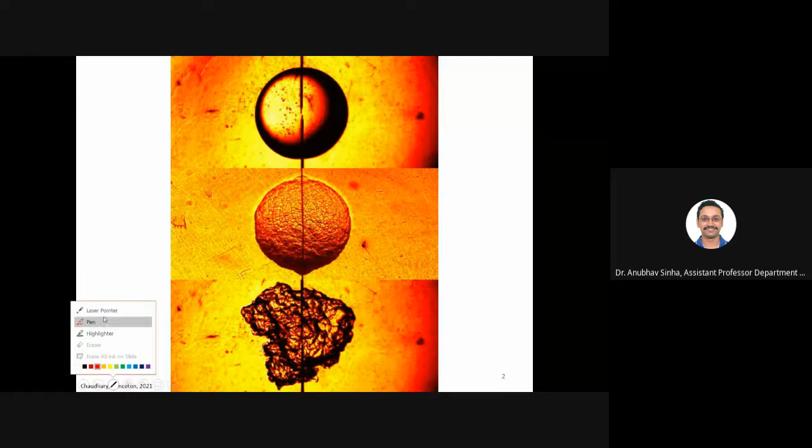Turbulent combustion is in fact a very hot area of research. And how do you understand or model what goes on in an actual engine, what goes on in a gas turbine or IC engine? This is what we are going to understand. So let me start with one slide from Professor Chaudhary. So what is shown here is spherically expanding flames. I take a big vessel, I fill it with some fuel, and I just burn it.

But as you can see, there are three different phases. His statement was three phases. Three phases of combustion. So can anyone define what are the three different aspects or three personalities of flame? What you can see here. What is the first one? Initiation. No, no, no. Let us say these are three different cases, not the same case. Three different types of flame.

Sir, can you repeat the question? I cannot understand what the question is. Laminar, semi-turbulent and turbulent. Yes, yes, yes. So my question is, three different types of flame are visible here. So what are the three different types? First one is what you have already studied. What is that? Laminar flame.

This looks nice, smooth sphere, no wrinkles. It is nicely going out. Laminar flame. But this is a very ideal scenario. Most of the cases you'll have something like this or this. So this is a highly turbulent case. This one, you can see some cells are starting to develop. You can see some cell-like structure, right? You can see or cannot see? Yes sir. Okay, so these are called cellular instabilities.

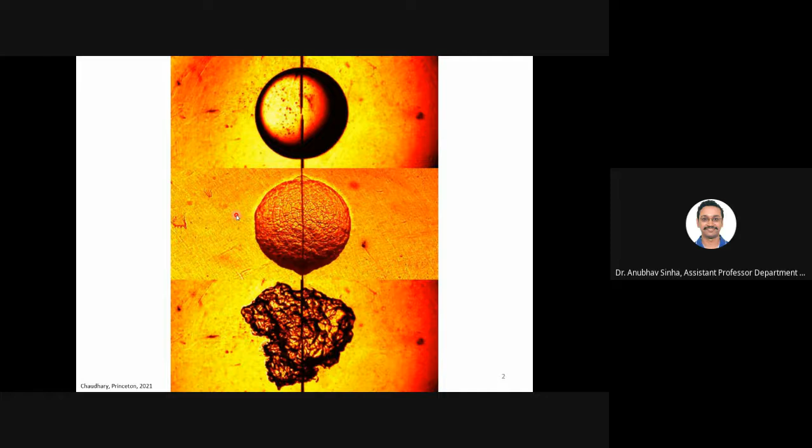I spent 2 years just to get some understanding of what is going on, and I still don't know a lot of things. So this is a very interesting area of flame phenomenology, where we also talk about the fractal nature of this flame front. I will show you some videos maybe. Okay, let us look at this video.

So in that you see that initially the flame is small and nice, but as it grows, it starts to, let me pause it somewhere. So this video I got from FM Global experiments. These were actually my collaborators. I got a lot of data from them about these experiments. So now can you see those cellular structures? Yes, sir. Is it more clear?

So this is because of cellular instability. I think this is an example from propane. The same thing happens at a larger radius for methane, at a smaller radius for hydrogen. But in most of the cases it happens. I will not be going into the detail of the formation, but it is one of the most interesting processes, and after a certain time, it will become turbulent.

There is something called flame generated turbulence. Okay, let me look at one video. Yeah. So this is what happens. Now let us see an application where that happens, this spherical expansion that you see. Now, if you remember the last example we talked about in the limit phenomena, last chapter, what was the last example? Just now we discussed. Anyone?

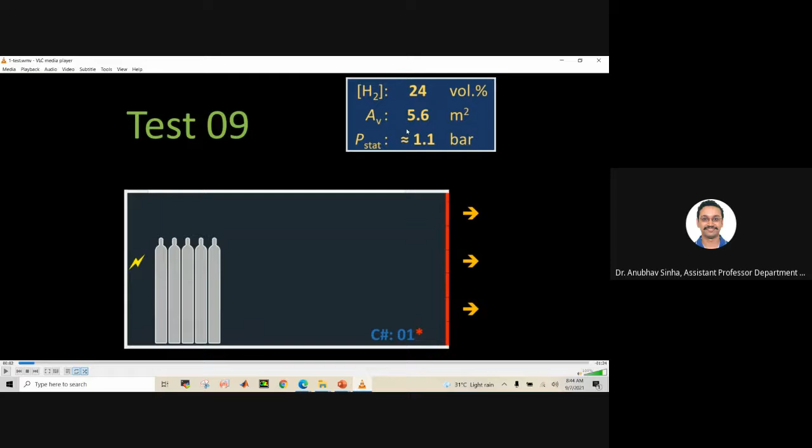So if it is a closed room, this is what is going to happen. Every wall will explode. So to prevent that, to keep you safe, what we do is we provide some vent. Let me show you a vent video actually. Okay. So you saw the last video, right? You don't want that to happen with anyone.

So what you will do is... Sir, in that process, what was the value of peak pressure? Wait, let me pause it. Yeah, tell me, what is the question? Sir, after that process, what's the value of peak pressure? As you said, peak pressure was something about 1 to 1.5 bar. 1 to 1.5 bar. And what was P stat?

P stat was, initially you have the vent. I will show you this. P static is initially what the pressure is, or the pressure at which... Okay, let me finish that video, then I will be able to explain. Okay, let me first talk about why that vent is required at all. So, the last video.

I hope no one wants that to happen, right? I don't want this to blow up, all the walls broken and all that. So what do I do? I want to keep it a little bit safe. Any idea from anyone how to make it safe? See, if you're using gas, it is going to leak. We need to install a mechanism so that it does not leak, but let us say that it leaks, and it gets ignited also.

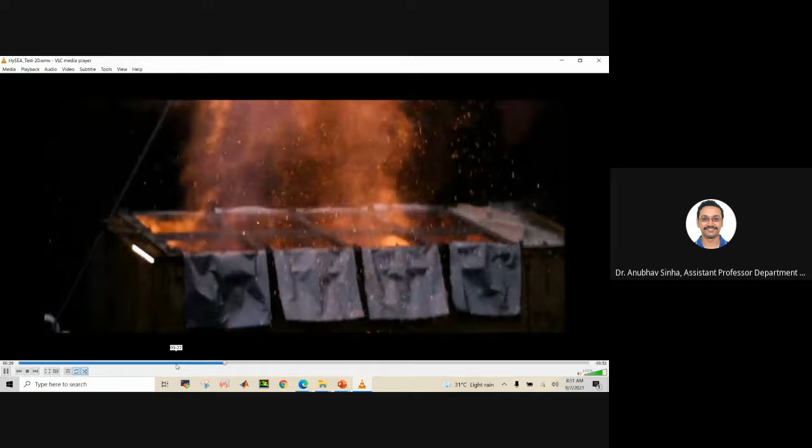See, all are exactly opening at the same time. Why? Because they are so precise, they work exactly on the same pressure. If you look at this particular image, they open, they release, most of the gas is thrown out. That is why the inside pressure developed is much lower than a closed case.

See, now the camera is also shaking a bit. One more snapshot, yeah, a different view is there.

Okay, one interesting question about hydrogen. So we had hydrogen here. If hydrogen leaks, forget about burning for now, let us say... okay, let me stop it here.

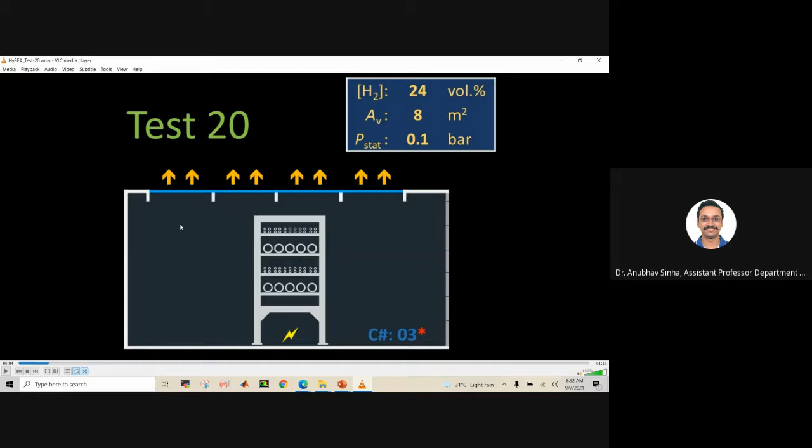So let us say this is a room, you can see my mouse pointer, right? This is the room I'm talking about, and let us say some equipment—forget about that—let us say from one corner I leaked some hydrogen. So what will happen? Will hydrogen mix uniformly, settle down, or go up?

What will happen? It will go up as it is light. Very good. So if you don't do anything, generally what we do is we put a fan and mix it thoroughly, or we use different methods for these experiments. What I'm doing here, we mixed it to make sure oxygen and hydrogen are thoroughly mixed.

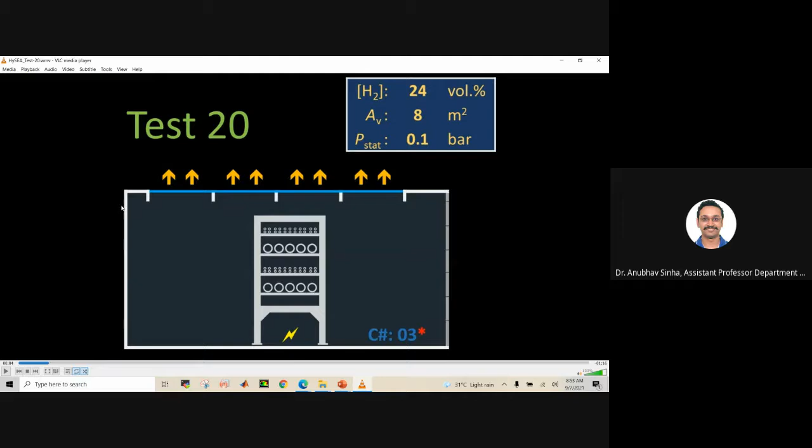If you don't do that, if you leave it undisturbed and allow it to settle, hydrogen will stratify. What do you mean by stratification? That the concentration will not be uniform. If I take a probe here and measure hydrogen concentration, that will be higher. If I take a probe here, that will be lower. So hydrogen will, let me take a screenshot and explain to you.

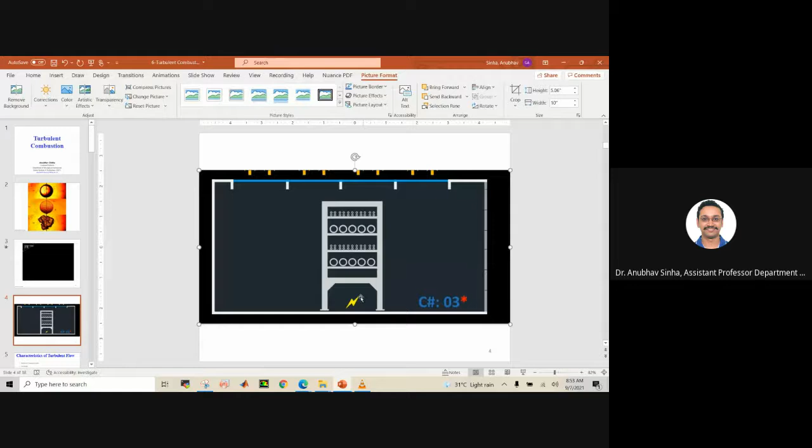Okay, so if I have a vessel here and I measure hydrogen concentration, it will be high here, low here. So generally we have some distribution. Hydrogen is, let us say, 20% here, 5% here. So the quantity of hydrogen goes on increasing. This is what we call a stratified mixture, or a mixture whose distribution is not uniform.

Is this clear to everyone? Yes sir. This is a very peculiar behavior of hydrogen. Other gases, if their density is different from air, will also have some effect, but hydrogen is very very light, so it will definitely form a stratified mixture. At different levels, it will have different flame velocity and so on.

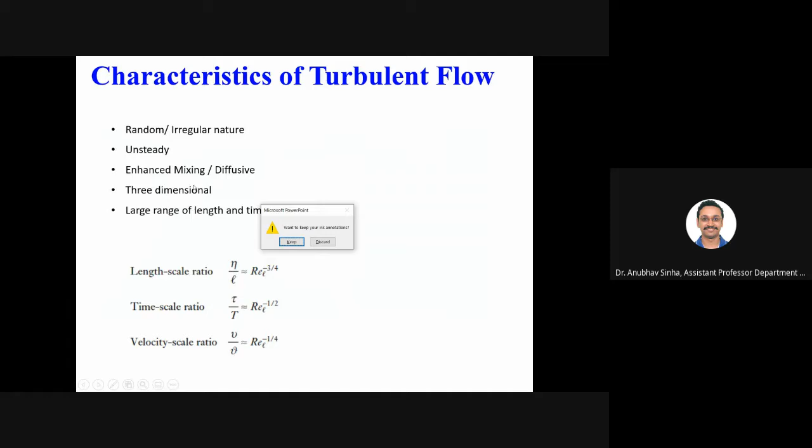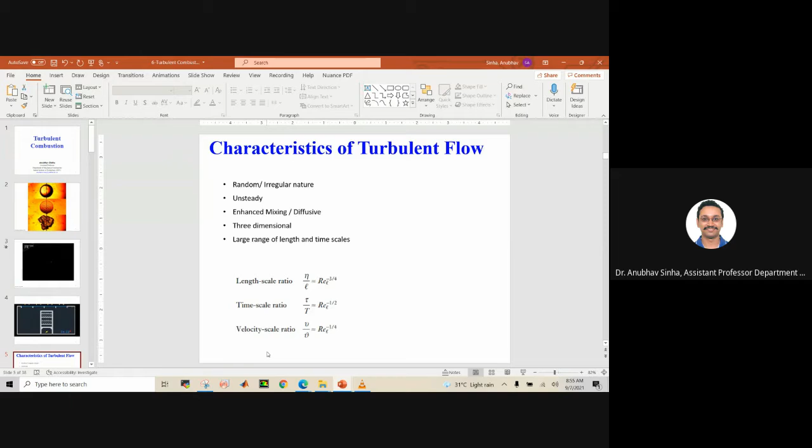Okay, so how much time do we have left? We have 5 more minutes. Should we stop? Okay, let us stop for today. Tomorrow we'll try to cover turbulent flame. Any questions so far?